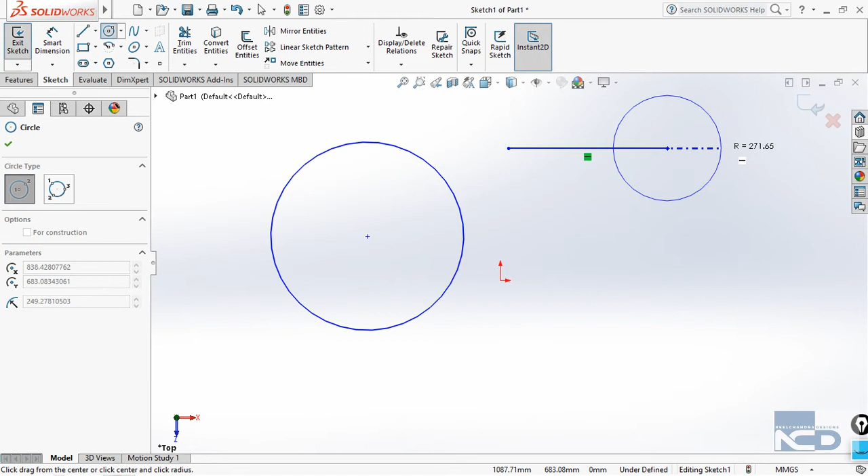Let's say you have one circle, one line, and on this line, if you want to create a circle over the endpoint of this line, you can just go for the circle. Just grab the endpoint of this line, and that will act as a center point of this circle. Click on that, and from there the circle will start. Similarly, from this other endpoint, just click on this circle, select this endpoint, and there we go, we have created two circles at the endpoints of the line.

Similarly, you have many other options as well in circle. Just click on this circle and click anywhere, and that will be taken as a center point. But before that, just click on the line, then click on the circle again, click on random positions, and that circle will be created.

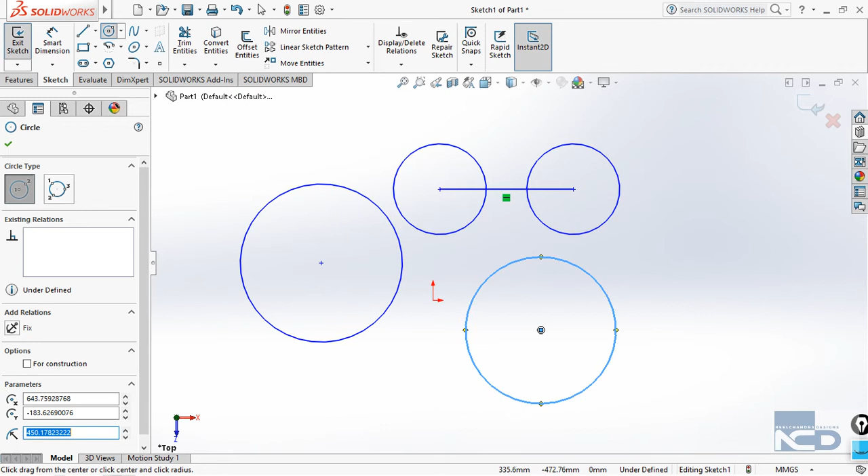Similarly, here you will find an option for construction written over here. Just tick on that, and you will find that the circle is now converted into a dotted line. So it's not a continuous line anymore, it is converted into a dotted line, meaning it is now used for construction purposes. We are going to discuss this construction purpose line later on, but as a hint, I want to tell you that these construction objects have no effect on the solid body, and they will only be used for creating reference points or reference sections. This is the basic use of these construction circles.

So let's provide one example. Let's say you want to create circles around this circle, and this circle is the continuous one.

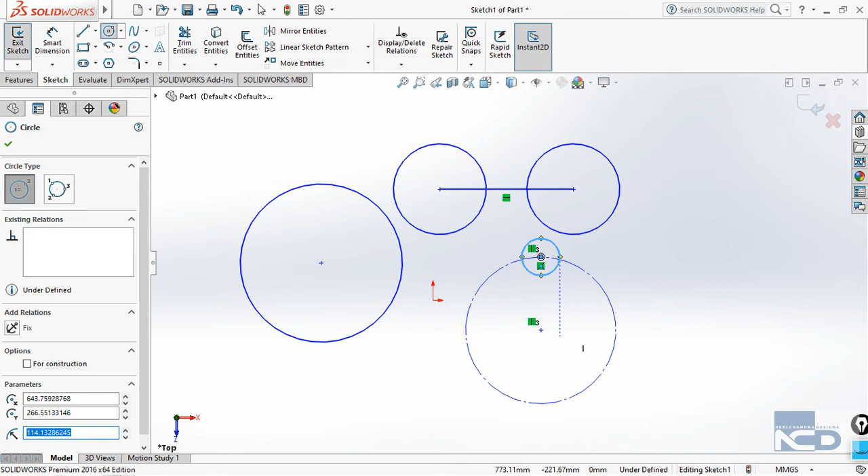So this circle will act as the reference value, and at the quadrants of these circles, the in-diameter points, you can easily grab those points, and this is how you create four circles around a circle. This circle will not have any effect on the 3D body because it is made up of construction lines. These four objects will only have the impact, rest all will not. So this is how this circle is constructed into a reference line.

Similarly, SolidWorks provides one more method of creating a circle, which is the perimeter circle. In this circle, the requirement of a center point is not there. You just have to provide 3 points on its circumference, and that's it. It will find out the center automatically by itself.

So how is it going to work? For that, I'm providing you one situation. Let's say you have 3 lines basically - this is one line, another one like that, then you have this line. You have to create a circle that will touch the endpoints of these lines and nothing else - this point, this point, and this point. My pardon that it is not touching, so just assume that this is touching these end lines. This is the situation I am providing to you.

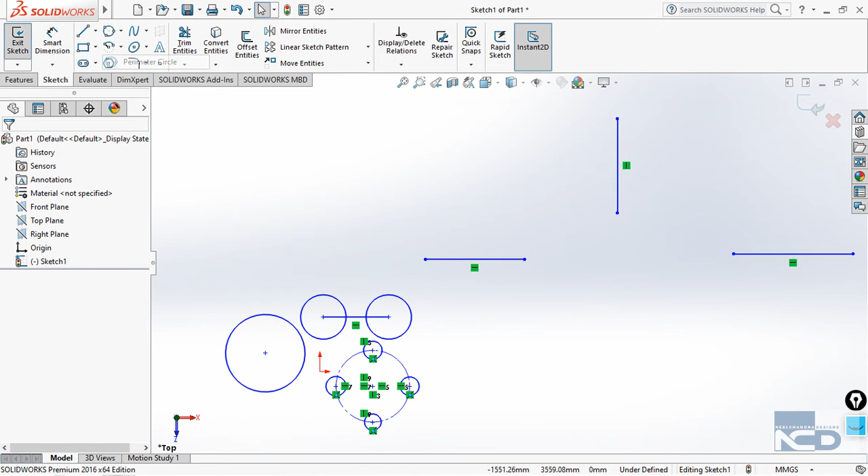For that, you don't have to go for the center circle, because this circle requires radius values and it is very difficult to find out the exact radius. But for that, we are going for this second kind of circle, the perimeter circle. As I've told you, it will not require any center point, it will just require the 3 perimeter points or the circumferential points.

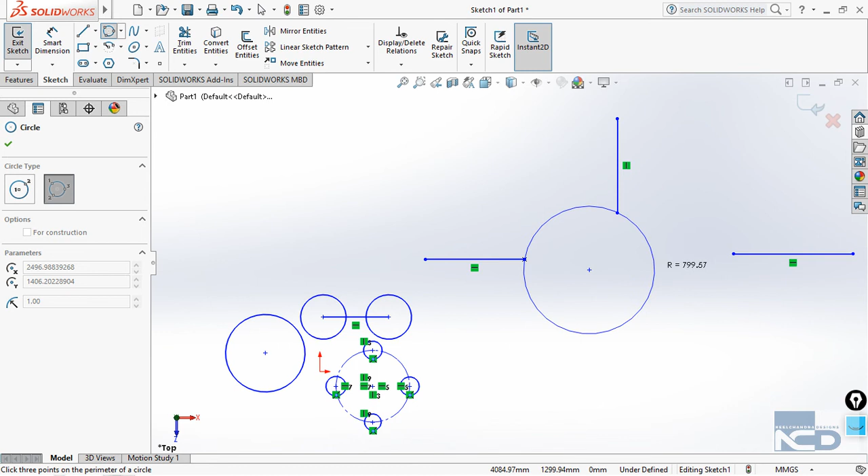So just click on this endpoint first, and you can find that the circle will start from there. Just click on this endpoint again, and now the circle adjusts itself according to those endpoints. Once you click on this endpoint, the circle is completely adjusted according to the condition that I have provided, and we don't have to worry about the center point. It will automatically detect that center, and this is the importance of this perimeter circle.

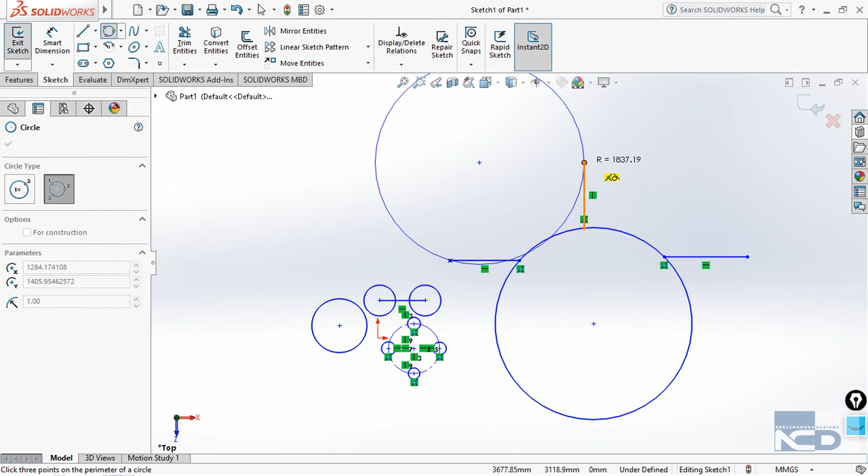Similarly, if you want to create from these 3 points, you can just select this one and this one. Similarly, let's say you have 3 circles instead of a line - this is your one circle, this is another one, and this is another one. The perimeter circle will work for these circles as well. So this is how a perimeter circle works - you don't have to determine the center point, it will automatically do that.

So with that, we have completed all our circle commands, and you just have to notice that if you want to provide dimensions here only, you can make it from this parameter section. You can provide the dimension radius value here, and the x and y coordinate, the center point coordinates, from here. So you can provide it from here as well, but this process is quite tricky, so we are going to see about the easy process later on. For the knowledge purpose or information purpose, I'm telling you about this. This x and y value will be calculated from this origin point, this x and y axis, the red axis that you are finding over here.

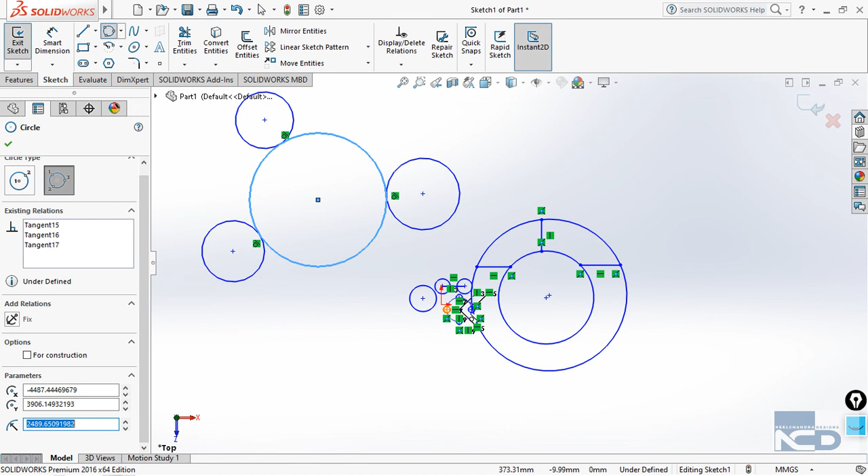So with that, we have completed our circle section, and to not make this lecture too big, I'm just going to continue about the accessories section in the later lecture. So let's find out about the accessories in the next lecture. So that's all for this lecture.